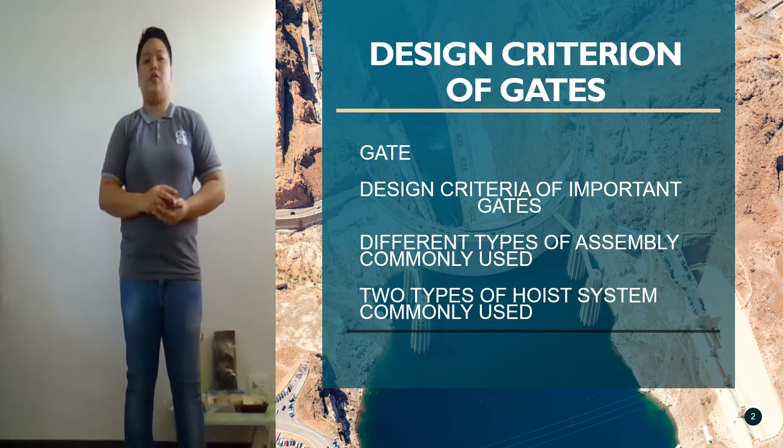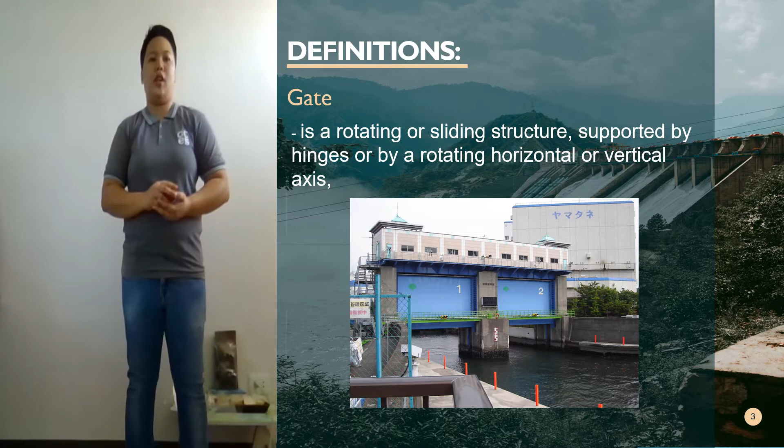What is a gate? Gate in hydraulic engineering is a rotating or sliding structure supported by a hinge or by a rotating horizontal or vertical axis that can be located at an extreme of a large pipe or canal in order to control the flow of water or any fluid from one side to the other. It is usually placed at the mouth of irrigation channels to avoid water loss, or at the end of drainage channels to elude water entrance.

Next is the design criteria of important gates. There are a lot of gate types but only a few are commonly used. Therefore, I will just discuss the important types of gate used for water resource projects as follows.

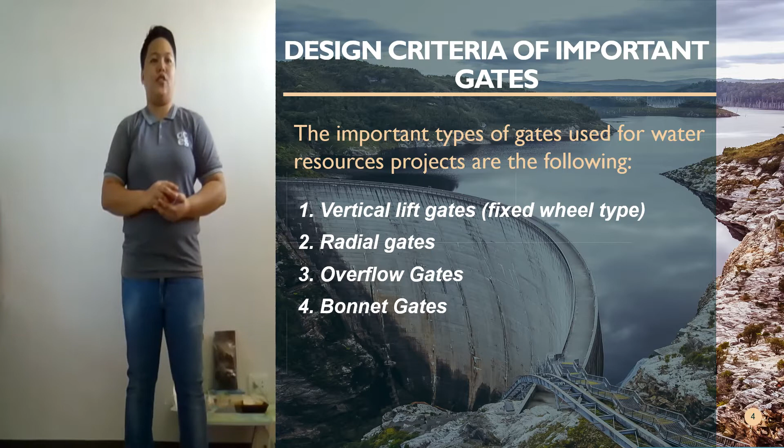First is vertical lift gates, fixed wheel type. Second is radial gates, third is overflow gates, fourth is bonnet gates.

First, I will discuss vertical lift gates. These are gates that move within a vertical groove incised between two piers. Vertical lift gates used for controlling flow over the crest of a hydraulic structure are usually equipped with wheels. This type of gate is commonly used for barrages but is nowadays rarely used for dam spillways. Vertical lift gates may be used for chute spillways and low-level outlet structures.

Typically, a fixed wheel type gate is used and generally consists of the following assemblies. First is the gate leaf assembly, which includes the skin plates, supporting beams, girders, bracing, and rubber seals. Second is the wheel assembly, which includes the main and side rollers, lubrication provisions, and mounting brackets. Third is the embedded seal path assembly, which includes the side seal, bottom seal, and anchors.

Fourth is the hoist tower and bridge assembly for supporting the gate hoist system. Fifth is the wire rope hoist system for smaller gates. The system may also consist of a rising stem gate hoist system.

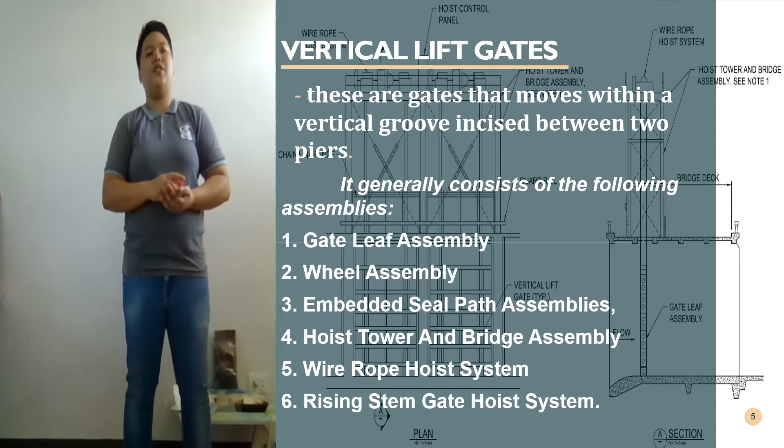Next, an example of a vertical lift gate arrangement with a traditional hoist tower and bridge assembly for supporting the gate hoist system.

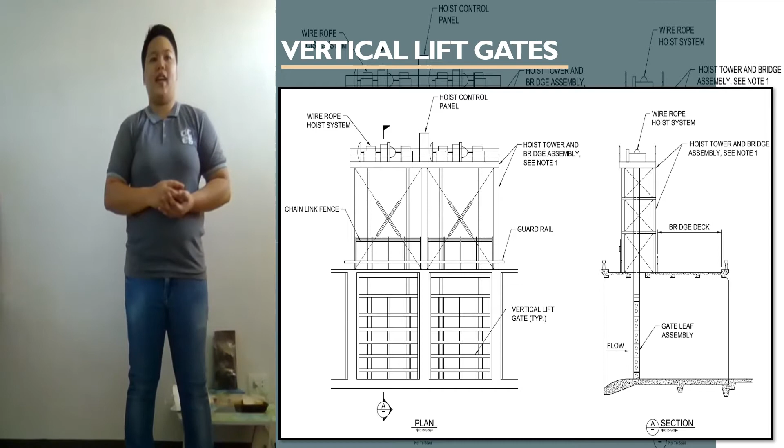Next is the various parts of the vertical gate. But before that, this is a general view and close view of the vertical gate.

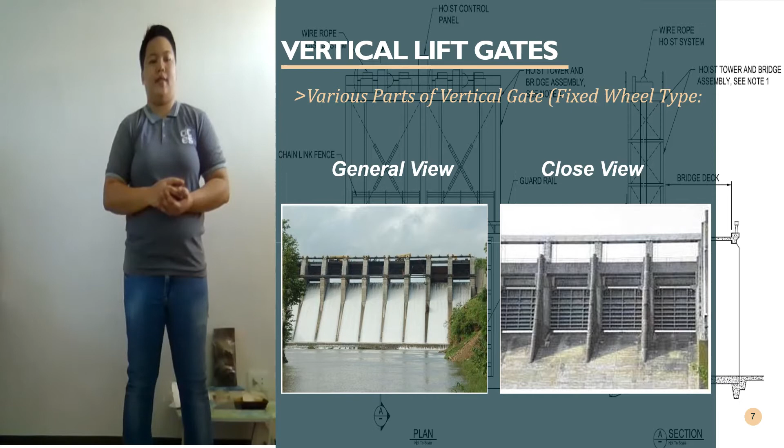First is the skin plate and stiffeners, which shall be designed together in a composite manner. It shall be designed for bending across the stiffeners or horizontal girder as applicable. To take care of corrosion, the actual thickness of the skin plate shall be provided at least 1.5 mm more than the theoretical thickness computed. Second is the horizontal and vertical stiffeners and main girder.

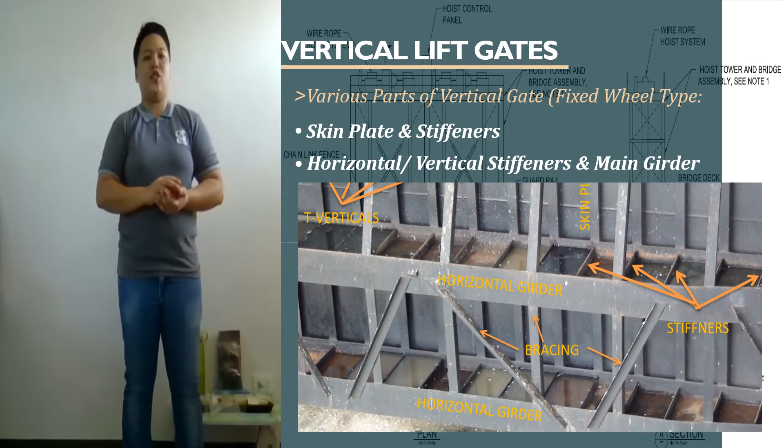The horizontal and vertical stiffeners shall be designed as simply supported or continuous beams, depending upon the framing adopted for the gate. The spacing between the main horizontal girders shall preferably be such that all the girders carry almost equal load. The maximum deflection of the gate under the condition of loading shall be limited to 1/800 of the span.

Next is another example of a girder.

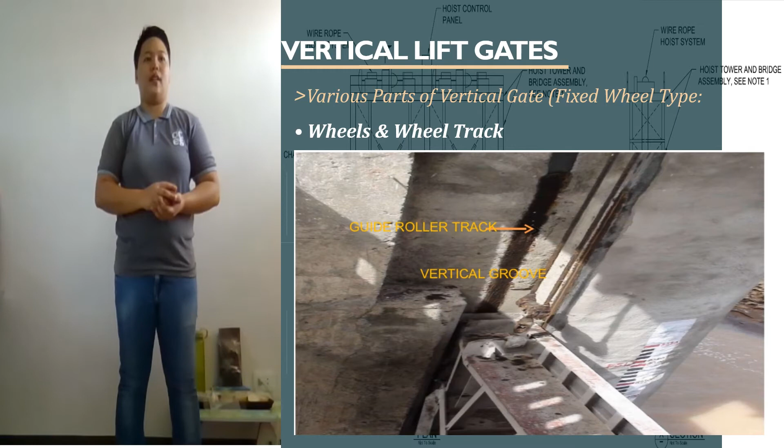Wheels and wheel track: the gate wheels shall be suitable to withstand the stresses developed due to hydrostatic loads which they will carry. The wheel track and track base: the wheel track shall provide a true and smooth machined surface for the wheels to roll on and transmit the loads through the wheels to the track base.

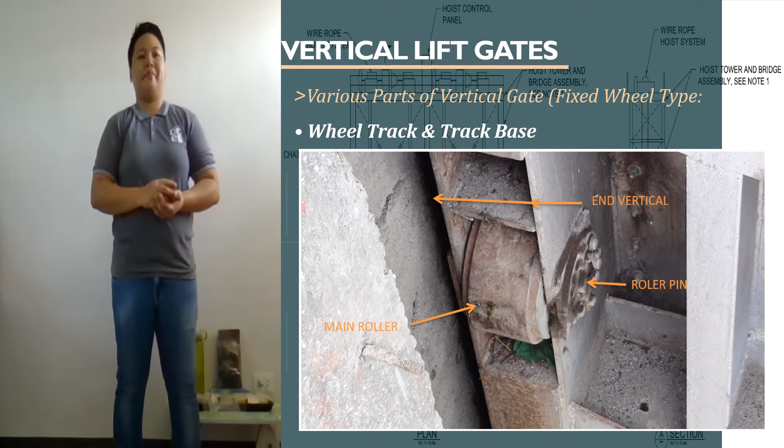The seal and accessories: seals shall be fixed by means of C-clamp or SS bolts so as to ensure a positive water pressure between the seal and gate, and bear tightly on the seal to prevent leakage.

Next is the guide roller. It shall be provided on the sides of the gate to limit the lateral movement of the gate to not more than 6 mm in either direction. A minimum of 2 guide rollers should be provided on each side of the gate to resist the transverse and lateral movement of the gate, and at the same time to prevent the gate from jamming.

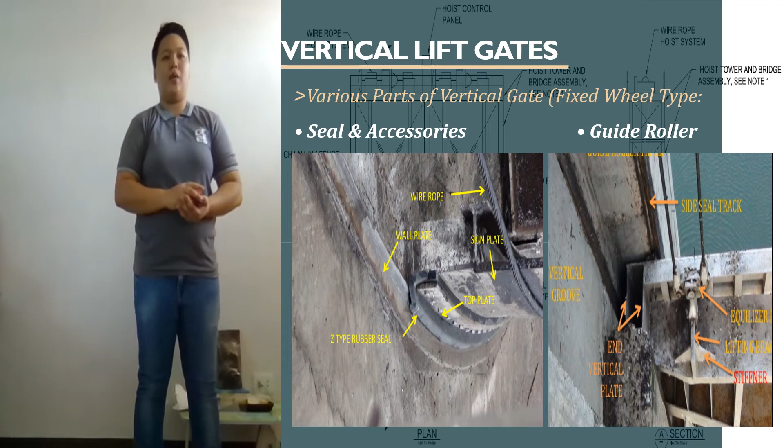The sill beam: the minimum width of the seal seat shall be 1.5 mm excluding the required chamfer. The minimum thickness of the skin plate for low head gates is 6 mm, and for medium and high head gates is 8 mm. The sill beam may be provided with corrosion-resistant steel plates welded or screwed with corrosion-resistant steel sheets. The surface of the sill beam may be machine smoothed.

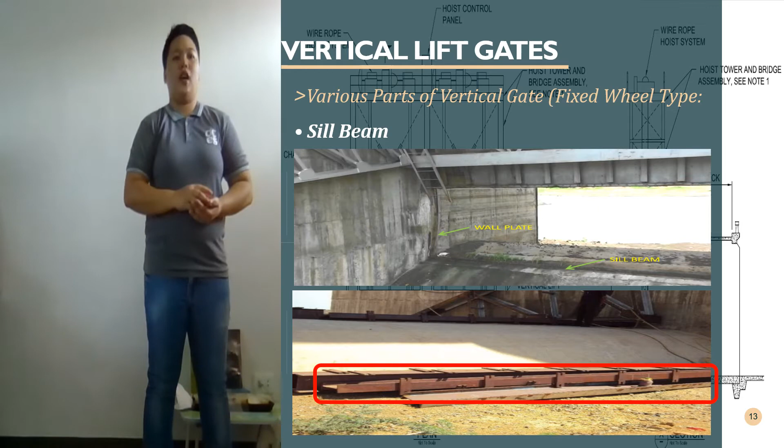The last part is anchorage or anchor plates, which shall be provided in the first stage of concrete with a suitable blockout opening to hold the embedded parts of the second stage concrete. The minimum size of anchor bolts shall not be less than 16 mm, and the anchor plate thickness shall not be less than 8 mm.

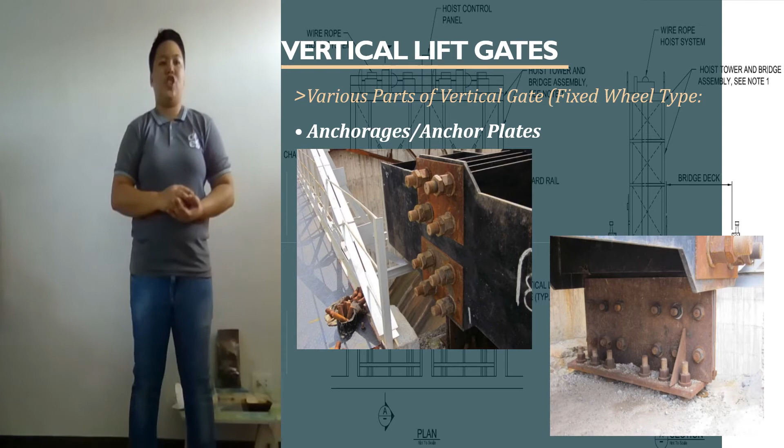The second type of gate is radial gates, or tainter gates, a type of radial arm floodgate used in dams and canal locks to control water flow. Currently, radial gates are being primarily used as spillways, floodways, and raceways.

Radial gates are seldom used in check structures because overflow gates can provide better upstream water level control. Radial gates are generally designed to discharge water under the gate.

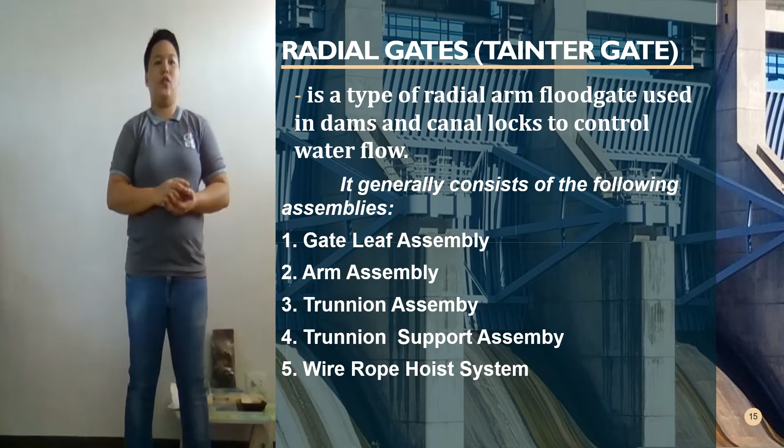Typically, the gates consist of the following assemblies and systems. First is the gate leaf assembly, which includes the curved skin plate, cross bracing or struts, supporting beams and girders, and rubber seals. Second is the arm assembly, which includes the arm columns, bracing, and hub.

Third is the trunnion assembly, which includes a pin, bushing, thrust washers, lubrication provisions, and yoke. Fourth is the trunnion support assembly, which includes the trunnion beam or anchor block and the anchorage system. Last is the wire rope hoist system.

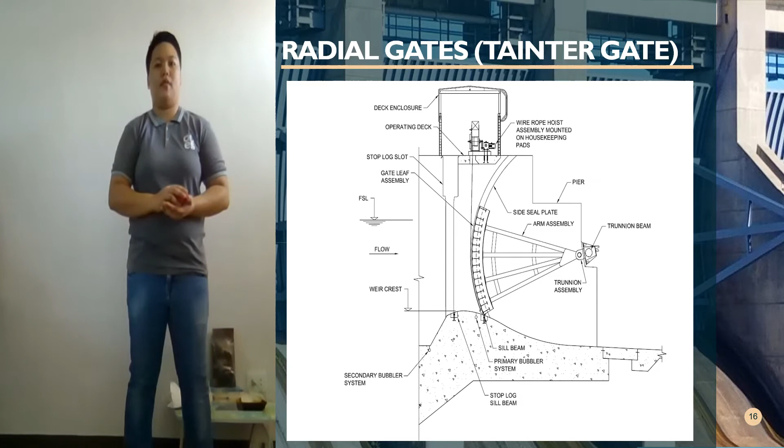In general, normally, a radial gate has an upstream skin plate bent on an arc with the convex surface of the arc on the upstream side. The center of the arc is at the center of the trunnion pin, about which the gate rotates.

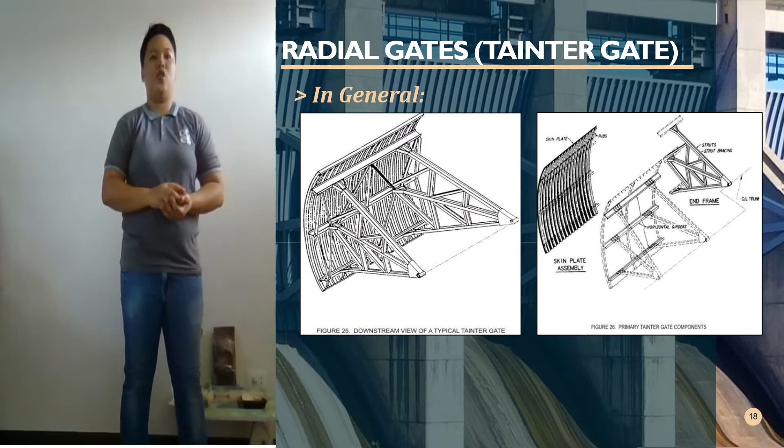The skin plate is supported by suitably spaced stiffeners, either horizontal or vertical. If vertical stiffeners are used, these are supported by suitably spaced horizontal girders which are supported by radial arms.

The gate shall be watertight. Maximum permissible leakage shall not be more than 5 liters per minute per meter length of seal. The gate shall be capable of being raised and lowered by hoist at a specified speed.

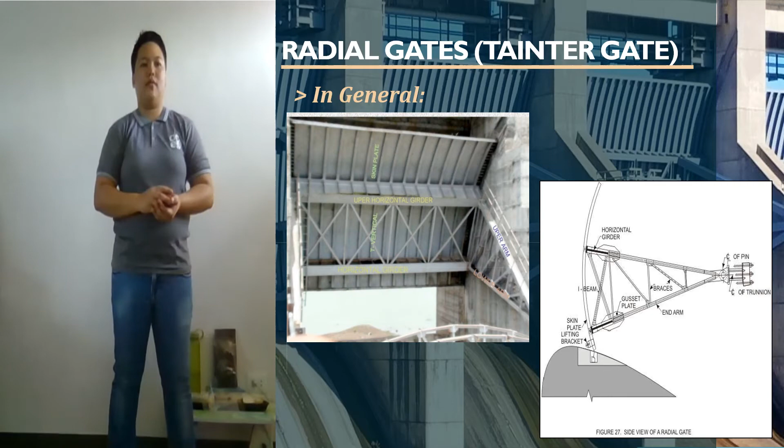Design of the gate involves A: fixing the parameters like, first, location of sill; second, location of trunnion; third, type of gate; fourth, radius of gate; fifth, location of the hoist.

First is location of sill. In general practice, we provide it 0.25 to 0.35 meter below the crest. Second is location of the trunnion.

It should be at least 1.5 meter above the water profile. The resultant hydraulic thrust on the gate, for the full reservoir level condition, should lie as close to horizontal as possible. None of any parts of the civil structure should interfere while raising and lowering the gate.

Third is top of gate: for effects of wave, freeboard shall be provided above full reservoir level. Fourth is radius of the gate: the radius of the gate is the distance from the center of the trunnion pin to the inside of the skin plate. It should be 1.0 to 1.25 times the head of water.

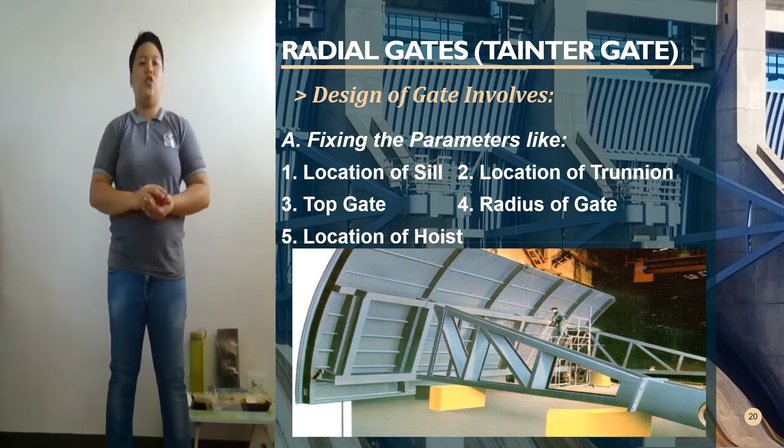A large radius shall increase the pier dimension. Last is the location of the hoist. The hoist shall be located such that, as far as possible, hoisting force is applied to the gate at the largest possible radius, and the hoisting angle does not change much during travel of the gate.

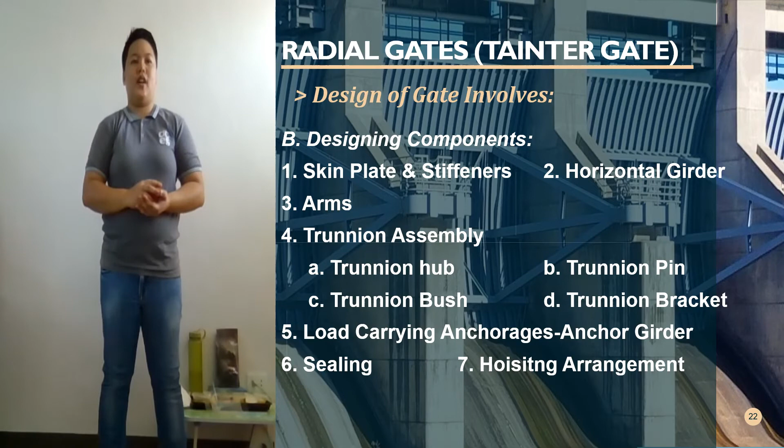Skin plate and stiffeners shall be designed together in an appropriate manner. The stiffeners generally use tees, angles, or channels. Minimum thickness used is 8 mm. To take care of corrosion, the actual thickness of the skin plate should be provided at least 1.5 mm more than the thickness required. Second is the horizontal girder.

Minimum number of girders should be used to simplify the fabrication, erection, and maintenance of gates. The number is finalized by the following criteria: if the number of girders is 2, then the gate height is up to 8 meters. If it's 3, then the gate height is 8 meters to 12.5 meters. If it's 4, then it's above 12.5 meters.

The spacing of the vertical stiffeners supporting the girder should be nearly equal. It should be suitably braced to ensure rigidity. It shall be checked for shear at points where they are supported by arms.

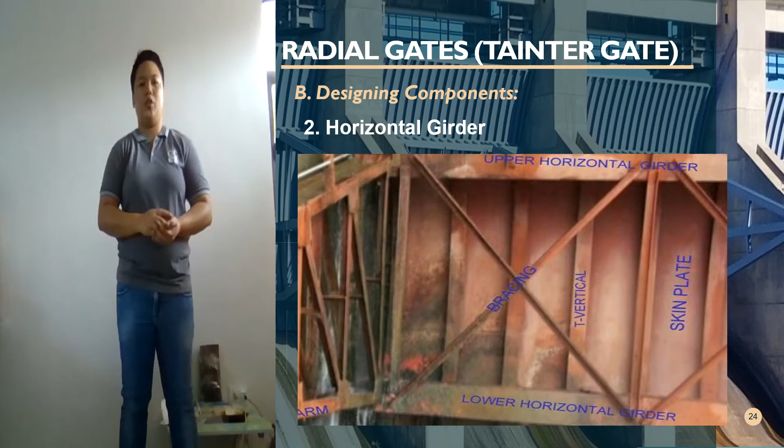Third is the arms. The number of pairs of arms shall be equal to the number of horizontal girders. Arms may be straight or inclined. For bigger spans of gate, inclined arms are preferred.

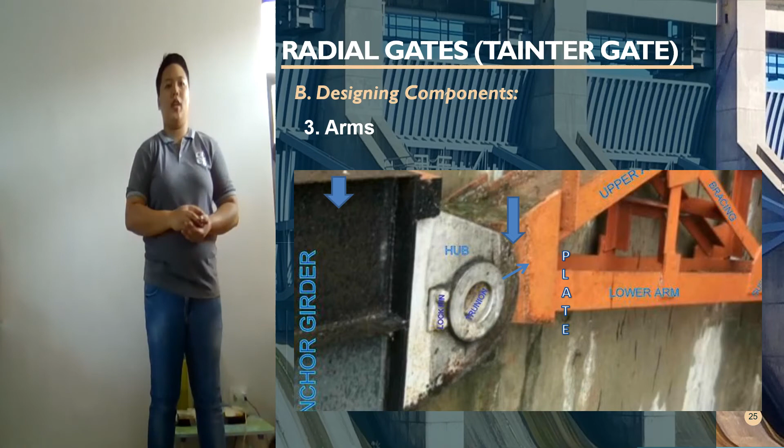The arms should be designed as columns for axial load transmitted by the horizontal girder. The arms are suitably braced in such a way that the ratio of the arm in the longitudinal and transverse direction is nearly equal.

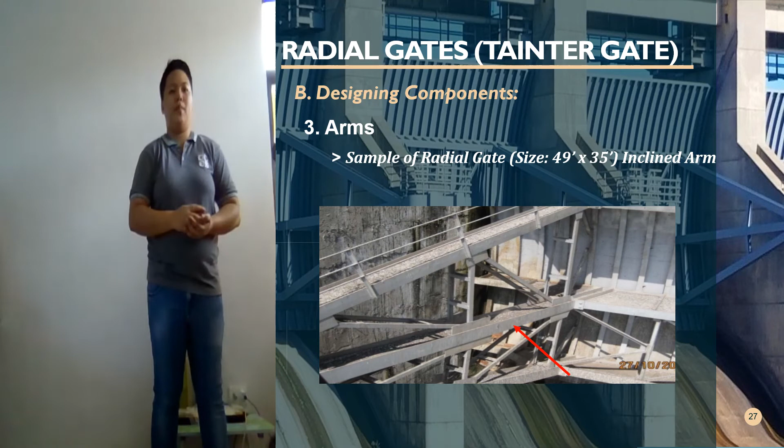Fourth is a trunnion assembly. It consists of trunnion hub, pin, bearing, and trunnion bracket. First is trunnion hub, which shall rotate about trunnion pin. Its arms are rigidly connected to the hub by welded or bolted connection. It may be cast steel. Second is trunnion pin, which shall normally be supported at both ends of the trunnion bracket.

It shall be cast steel or forged steel with chrome plating. Third is the trunnion bush. It should be high tensile bronze. Fourth is the trunnion bracket. It shall be rigidly fixed to the anchor girder by bolts. It shall transfer the total load from trunnion to the anchorage, and it shall be cast steel.

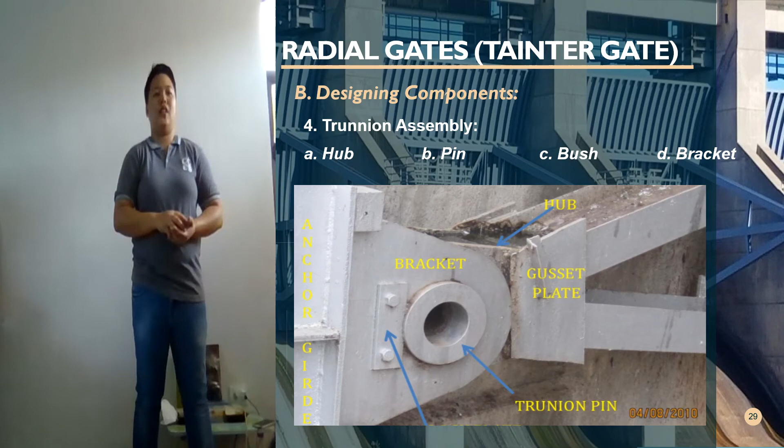Fifth is load carrying anchorage and anchorage girder. It shall be designed to withstand the total water load of the gate and transfer it into the piers. Generally, a common anchor girder system is used. It shall be designed for maximum load when one gate is fully closed and the adjacent gate is fully open. Number of anchorages and root diameter of the threaded end of the anchorage are worked out against total tensile load.

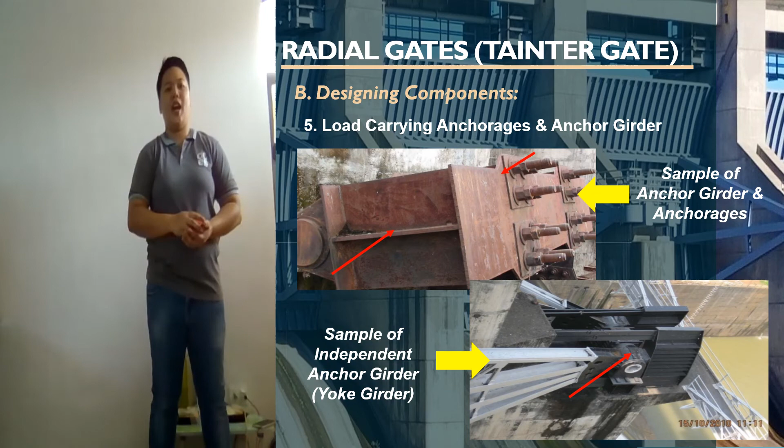The embedded length is worked out for bond strength requirement. However, minimum length of anchorage shall be 2/3 of the radius of the gate. When trunnion is kept at 1/3 height of the gate, the anchor girder is kept in horizontal position.

Sixth is sealing. Bottom rubber seal, usually a wedge type seal, is fixed on the gate lip with clamps. Side rubber seal is zip type or musical note type. 3 to 6 mm compression is given to rubber seals to make them watertight.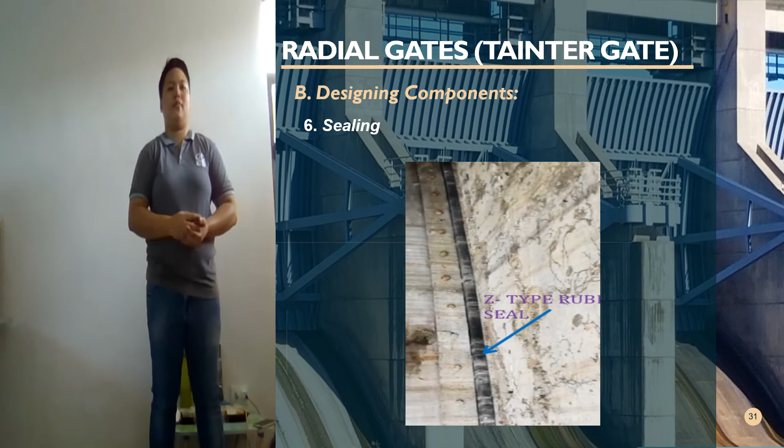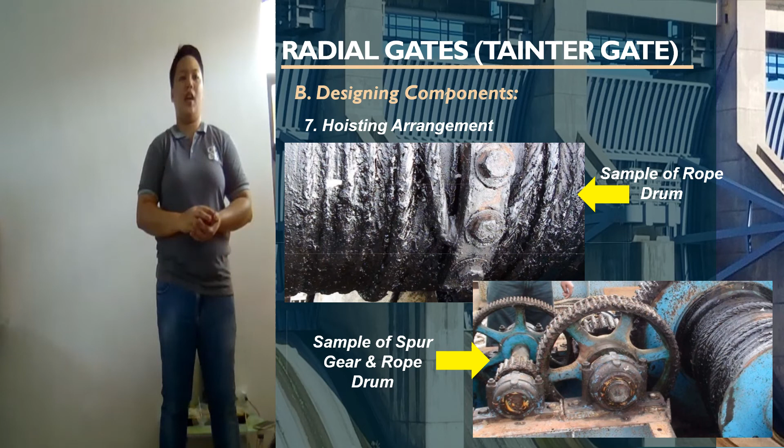The third type of gate is overflow gates. Overflow gates are typically used on main canal check structures to provide upstream level and flow control. They may consist of either a bottom-hinged leaf gate or a Langemann gate. Since the gates are operated as overflow gates, air vents are normally installed within the piers and sidewalls to supply air to the underside of the gate to ensure the nappe forms.

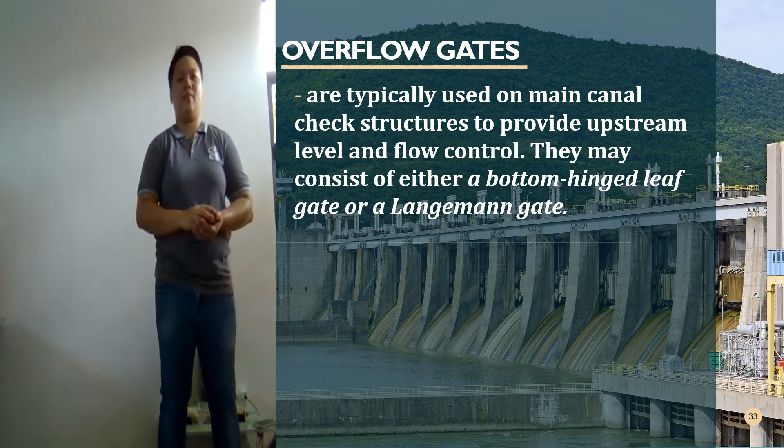The Langemann gate was developed in 1994. The pre-assembled gate generally consists of top and bottom gate leaves connected together to the gate frame by hinge. A rigid gate frame and side plates connect to the structure, with built-in air vents and roller chains that connect to the top corners of the gate to the hoist system.

The gate hoist system generally consists of an electric motor that can be powered using solar panels and batteries, gear reducer, and shafts mounted on the pier and end walls. The main advantage of the Langemann gate versus a bottom-hinged leaf gate is that it requires shorter length of structure, a simpler hoisting system, and it is easier to install.

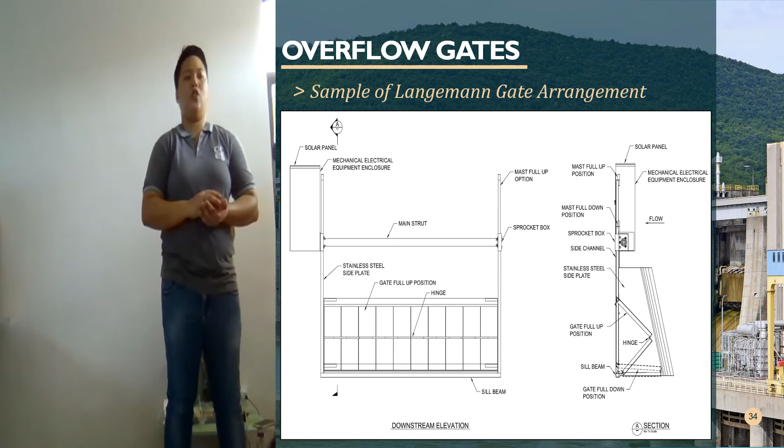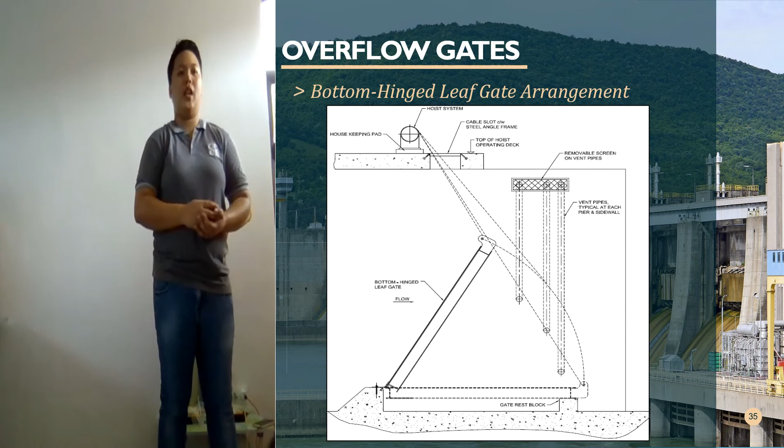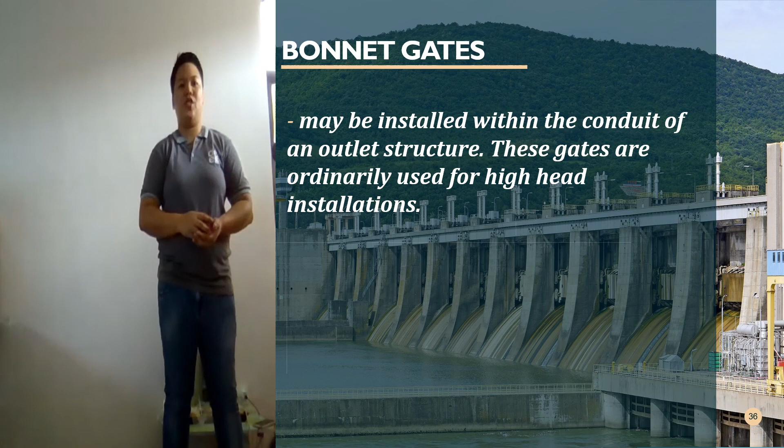The bottom-hinged leaf gate generally consists of a bottom hinge that connects the gate to the structure, a gate leaf consisting of skin plate and supporting beams, and wire ropes at the top that connect to the wire rope hoist system. The last type of gate is bonnet gates, which may be installed within the conduit of an outlet structure. These gates are ordinarily used for high head installations.

Typically, two identical gates are provided in tandem, with the upstream one serving as an emergency or guard gate. The bonnet gate generally consists of a gate leaf and body consisting of upstream and downstream frames, the bonnet and cover hoist system, and gate hanger system. Sealing and sliding of the gate occurs at the mating surface between the gate leaf, body, and bonnet. Provisions for lubricating the gate seats to reduce friction and wear, and to allow adjustment of the position of the hydraulic rod or flange, should be considered.

Depending on the head, cavitation may occur, particularly at the bottom surface of the gate, at the side and seal location of the body, and immediately downstream of the gate. Consequently, the cavitation potential should be examined and appropriate mitigative measures taken. In addition, the provision of a 45 degree angle slope at the bottom of the gate leaf along the upstream side, to produce positive pressures that will reduce the downpull force and ensure positive control of the spring point, should be considered. An air vent must also be provided just downstream of the gate to air the conduit.